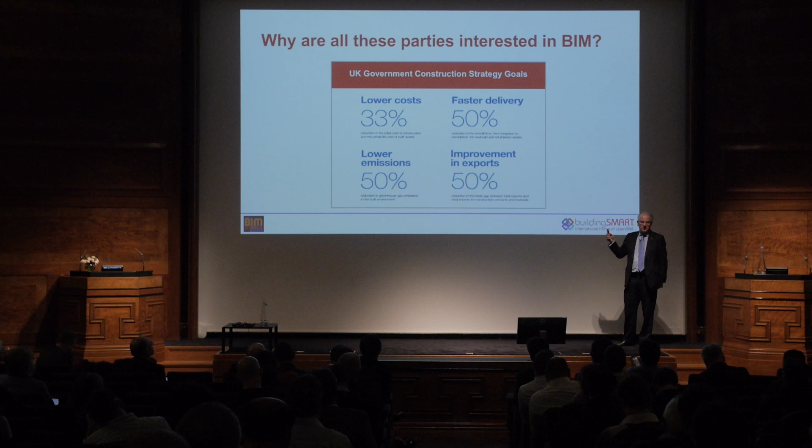Peter, I've borrowed one of your tables here because I think the UK government has been bold in setting out those targets. But the point I want to make is that those are very significant, and if they're very significant, they're very important for governments to go after and for industries to go after. So this is, in many ways, that overriding big, hairy goal that the industry has to deliver for societies that they are trying to serve.

And in fact, I also contend that we will not be successful as an industry if we approach this problem in a fragmented way, with everybody guarding their piece of competitive advantage. So I think the scale of benefits available, and the fact that there are so many countries around the world looking at this task, means that it is beholden upon the broader construction industry and owner community to really consider how they go forward with this.

And I want to use that as a framework within which to help you understand what buildingSmart International and buildingSmart chapters do. Chapters is, again, perhaps a buildingSmart word. Chapters are the national organizations that engage directly with users in different countries around the world. And that chapter program has been going for a long time.

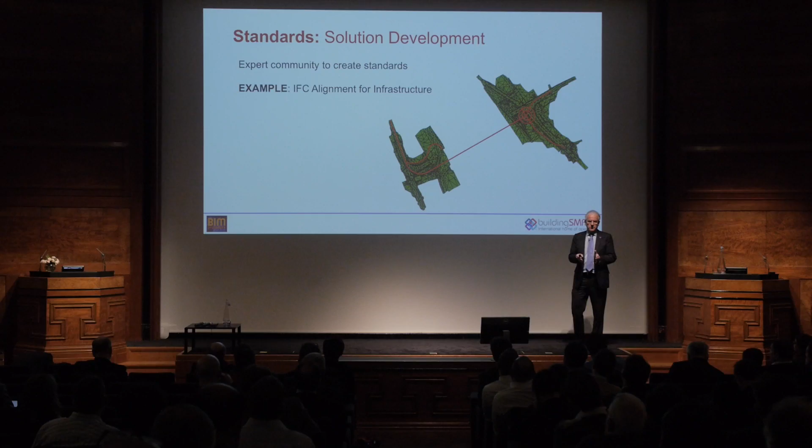The first is the standards program, and the most clear benefit I could point to is that we are doing solution development. This slide is an example of a recent project to develop, for the infrastructure community, an alignment solution to help them work in the digital world with the IFC tool developed in our community, and also in parallel with the GIS world and the OGC standards developed there. That was a very successful collaboration, a good example of the working-together theme, done in a relatively short period of 9 or so months, and now available as a standard to be used.

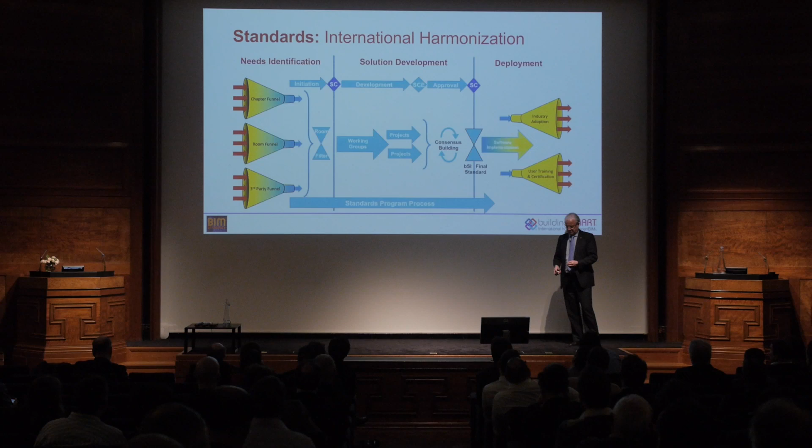The compliance program is probably ambitious compared to where we are today, but nonetheless absolutely important. People need to know that this stuff works and is being used properly. We will establish a program in time whereby we cover the basics of whether it's being used properly and whether it works — for software, individuals, organizations, processes, data, and products. This will probably take some time to be up and running, but it is absolutely part of the puzzle and necessary, and as Peter said, this transformation is a medium-term exercise, so I'm confident it can come into place.

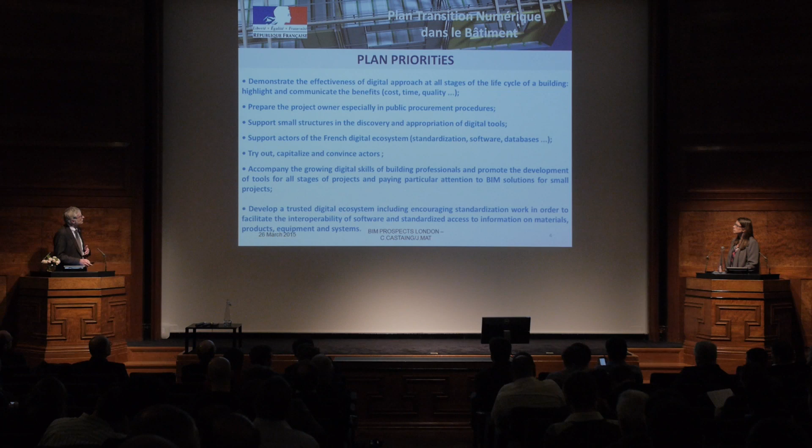Okay, so to summarize the priorities, we can say the following. To simplify, first is to develop the question of standardization, to support the existing standards, IFC and so on, creating the environment around that, but also to support the French initiative and the works to be done at different levels of standardization, from buildingSmart to ISO, CEN, and others, but also to support the activity oriented to the question of product libraries.

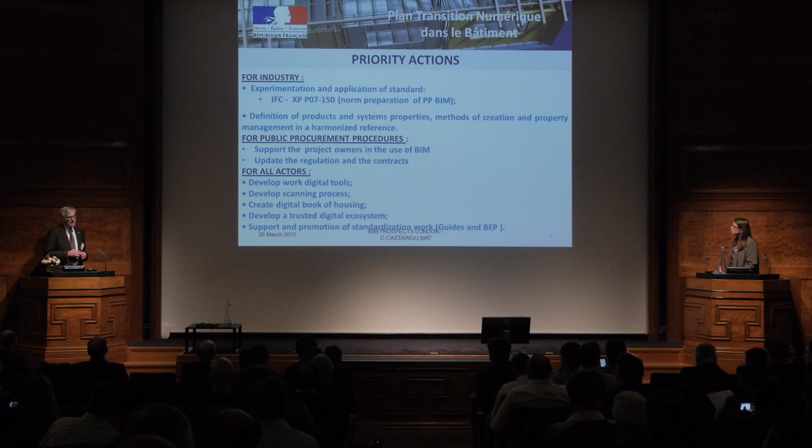I think I mentioned at the beginning that the big majors, one of the majors is Saint-Gobain, for instance, or Schneider Electric, or Legrand, like that. So they are involved in this research to develop.

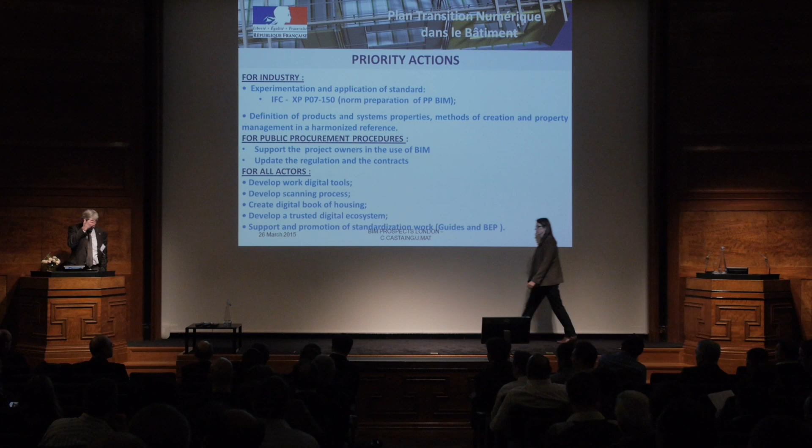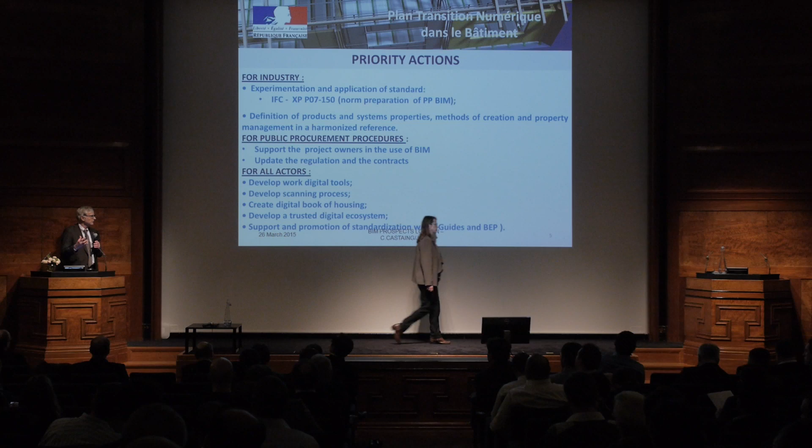If you want to speak with the very small companies, one of the best issues is that they are very small. If you are able to have everything available in a pack, like the windows, the equipment like that, in this case the very small companies are very interested by that. That's the reason we are pushing this kind of research, to be able to provide BIM for everybody. And BIM is not only the full 3D modeling, it could be only to have the catalog of the object available on site.

Second activity, crucial, is the question of how to facilitate public procurement. So there are two activities around that. The first one is how to manage the regulation as it is. We have a very strong regulation around public procurement. Is it compliant with BIM? And so on. So that's one issue. And if we don't want to transform that into a political issue, we don't want to modify the law for that, because that is an issue.

And the second one is how to manage or modify the contractual structure. Again, it's linked with the first. If we are able to manage the BIM toolkit and so on, it's a help for everybody and for all actors, which means to support the schools, to support the universities, to be able to provide human resources around BIM. And also, the final one, is to support all of the experimentation, to be able over the next two or three years to go smoothly into BIM in procurement and beyond.

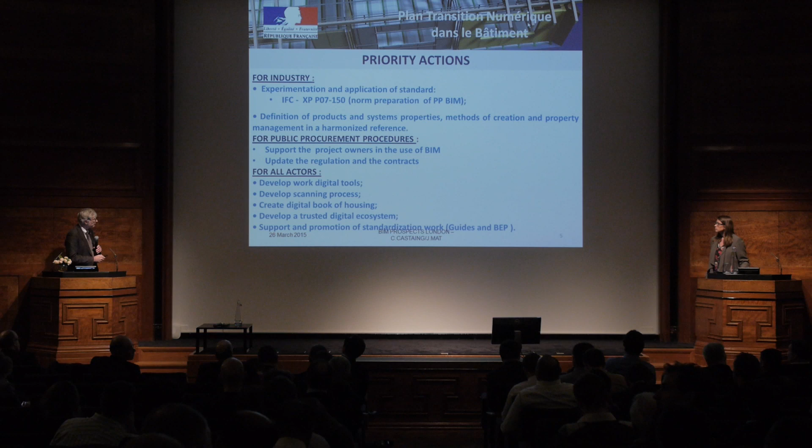And just to finish, the question is, there is somewhere 20 million euros available for that. We discovered that it's possible to have that. It's not a small affair, it's a big affair, and we think that is something really powerful to help all of the industry.

So how are we going to do that, if we want to go smoothly but not spend the money for nothing? The first one, we have this structure. At the top, you have a steering committee, which is representative of all of the professional unions, including also the various Ministry of Housing, Ministry of Energy, Ministry of Finance, and Ministry of Budget.

That's the reason we need to have also a structure to be able to justify a roadmap, and first to create a roadmap and to justify how we are going to spend the money. So you have a body, a technical body, with full-time people around that, and a technical committee to help this body make decisions. And then we are going to proceed project by project with calls for projects and bidding. That's the structure to be able to spend and to increase our knowledge about that.

That's it. Thank you. Christoph, thank you very much.

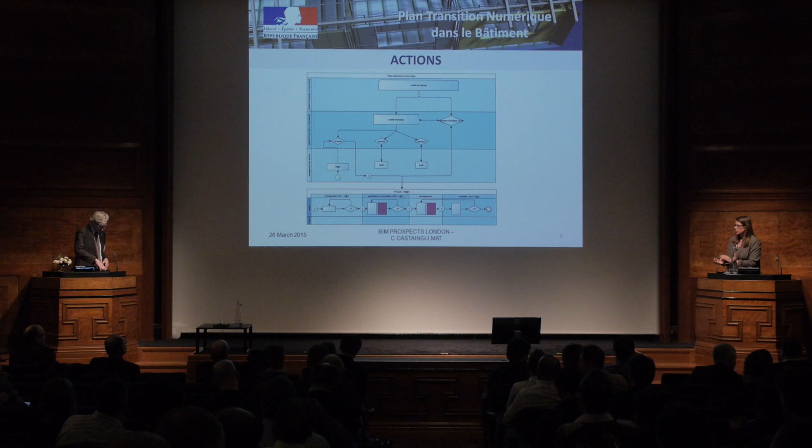Okay, Tommy, if I can invite you to come up to the platform here. Is it the right one now? Yes, success. So Tommy, okay, thank you very much.

My name is Tomi Henttinen, and I'm an architect by profession, even though I have been doing BIM consulting for 15 years already, so maybe not so much like normal architectural design work. In Finland,

BIM is always open standards. We work with open standards. My company, Gravicon Oy, we have been involved within the years for over 10 years now, with over 60 real-life BIM projects utilizing IFC in the daily routines of the project, and that's in design and construction phase. Nowadays, it's also in infrastructure projects where we are utilizing open standards, even though I'm not an infrastructure specialist. But anyway, the land XML format is widely used in Finland. So in Finland, BIM is always IFC.

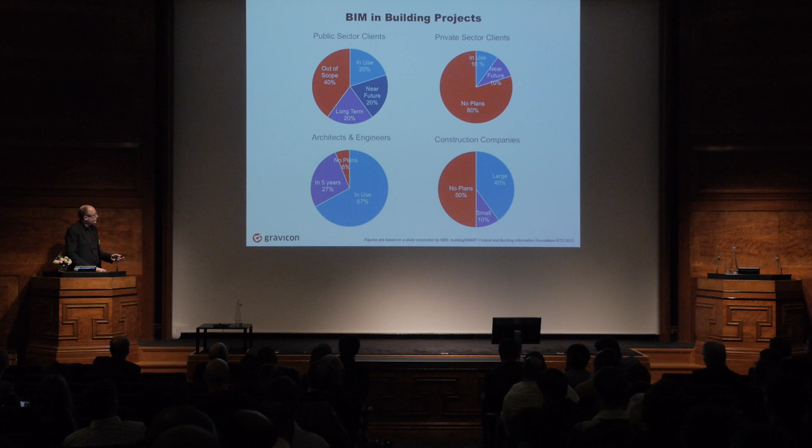I was hoping that Patrick MacLeamy would use his famous BIM Bam Boom presentation, so I could just refer to him, but maybe you should Google that. I'm not going through that. You should Google that, it's really nice. BIM meaning BIM in design phase, and BAM meaning the building, BIM-based assembly,

which is the construction phase. In those I would say that we are quite good in Finland. We know how to do it, and we use it in daily operations. Then in the boom phase, which is maintenance and operations, we are not there yet. So even though we are using BIM in design and construction phase widely, in the operations and maintenance, it's close to zero.

My idea of BIM is that together with other trends such as Internet of Things and others, we would get to the next phase, which is BIM-enabled business, which is bringing something totally new to this discussion. So it's something that, because now BIM is basically, to be honest, just, okay, first we were using pencil, then we were using CAD, now we are using BIM. The same thing done differently. But if we go to BIM-enabled business, then we are doing things in a totally different way. We have totally new stuff coming up. And this is sort of what we are at the moment trying to get our knives sharpened on in Finland.

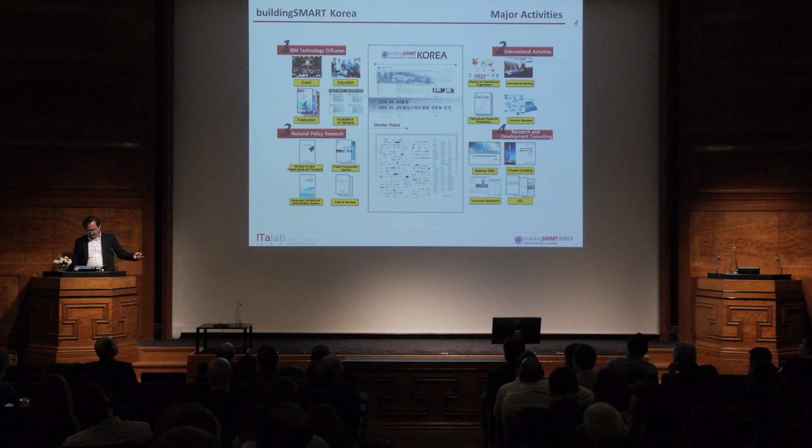BuildingSmart Korea developed a national guide for BIM in Korea, and also many public agencies BIM guide, and developed a guide for public company, design and construction company. This is some of the guide and standard developed for our government, agencies, and public companies.

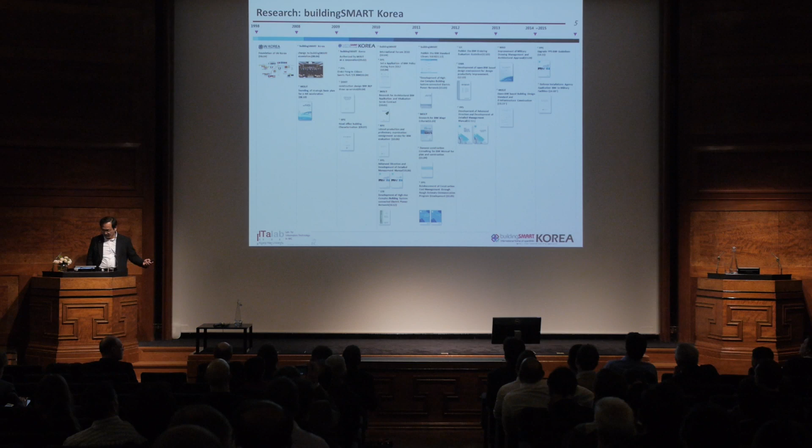For less than several years, we developed a guide for public procurement service. It's a GSA equivalent organization in Korea. And also we are developing a guide for Ministry of Defense and construction as well.

A few years ago, our government invested a lot of money on open BIM. For this event, this Monday, Tuesday, and Wednesday, we had an international summit for BuildingSmart at BRE. There were more than 20 Korean delegates participating.

They mostly participate in this project. It's about a 6 year project, now became a 7 year project, started last year, and government supported about $30 million US, and with money from the private sector, it is more than $40 million.

This project until next year is stage 1, but after 2016 or early 2017, we are going to the second stage of this project, and our government recently announced to invest much more fund on open BIM and BIM technology.

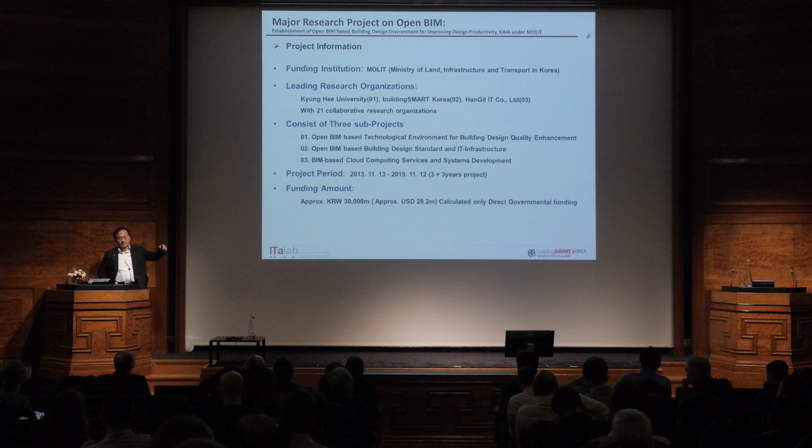Currently we only submit digital 2D data for the permission, but we are trying to move on to an IFC-based BIM model for the permission in the future. So we are developing all the core technology for that.

The first target of this project is enhancement of design quality, not construction yet. So at the first stage we concentrate on quality of design rather than construction, because design is the most key stage for saving cost for the construction in the future stages, or also for the maintenance stages.

So we concentrate on design, libraries, and guides for that. In the future, we're going to apply those technologies to the whole built environment, like railway, plant, road, and water. So this is the basic technology for the future.

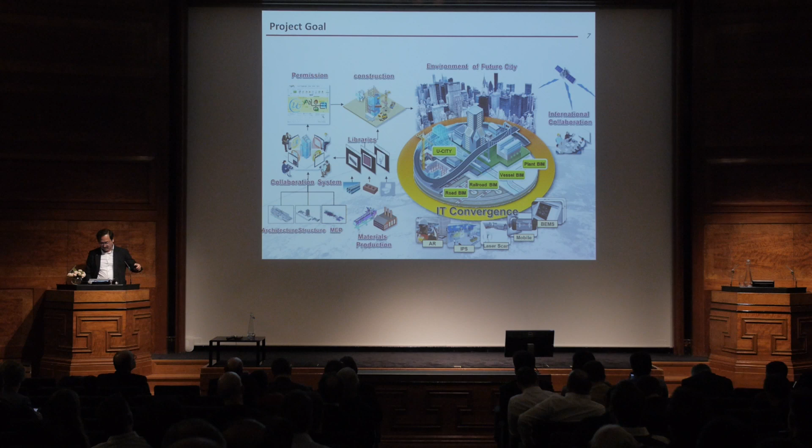This is one of the key projects we are targeting right now. We want to save money, cost, and resources for the building permission.

The architect needs to supply only one single IFC-based BIM model for the approval, and then by using those models, the person who permits the building checks the energies, cost, and all the regulations automatically.

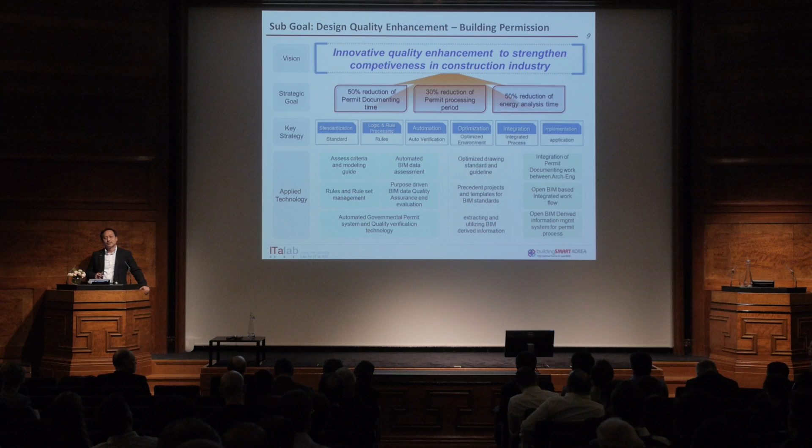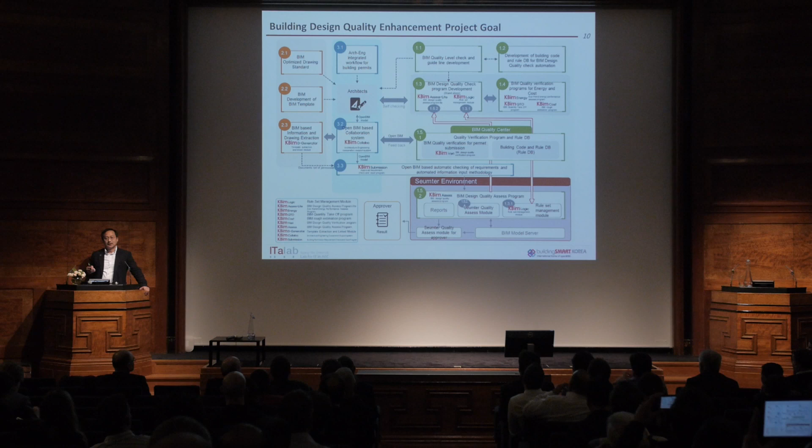So this is the actual scope of each module, how we developed it for the permissions. If you see the bottom left spaces, we're developing about 10 different softwares, K-BIM softwares for permission, collaborations, and logic. We analyze all the building code and atomic sentences and then put them in the database, and we use them for automatic code checking in the future.

And if you see the right bottom spaces, we can see the Seumter environment. That's for the building permission environment in Korea. So they check the BIM model for the approval. This is one cycle process for the process, yes.

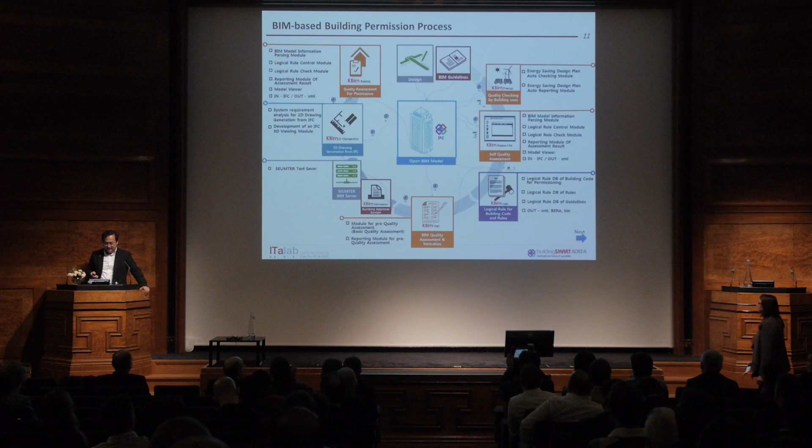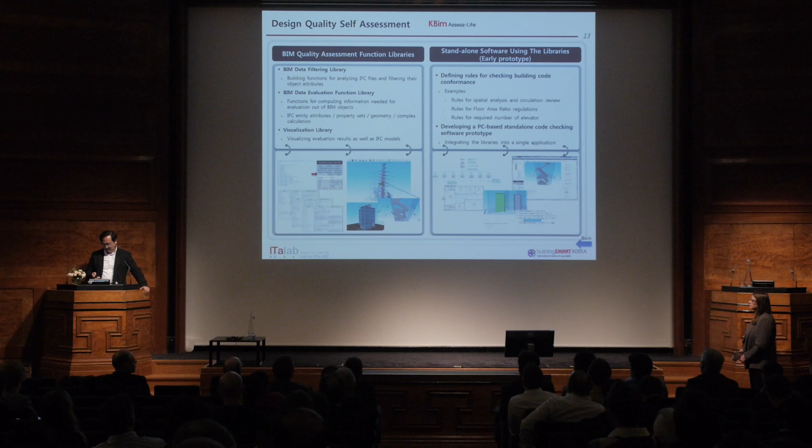And another module for K-BIM logic, and this is Assess. This Assess Lite is for the small versions. Design office can use it without internet connection. And if they do self-checking finished, they submit it for the approval office.

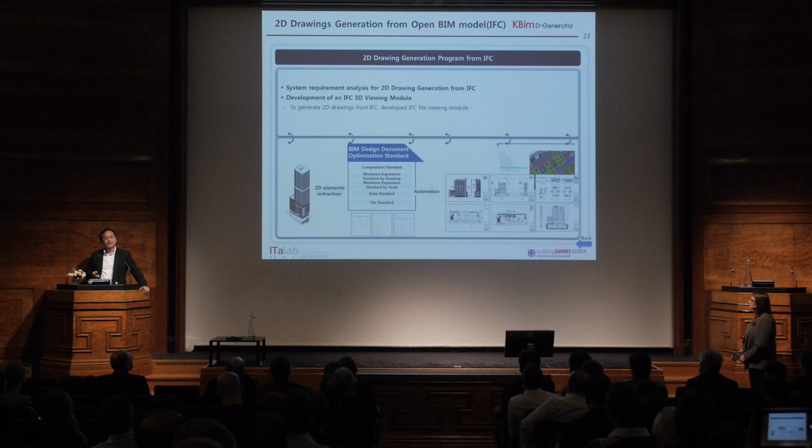And they can check the energy requirement required by our government. Also, one notable thing is, from the BIM model, we generate drawings for the permission. I think more than 50% of drawing can be generated from this software. And this is the submission environment and software for the Korean submission system.

As I'm running out of time, maybe 1 or 2 more minutes. This is the standard and content development by BuildingSmart Korea framework.

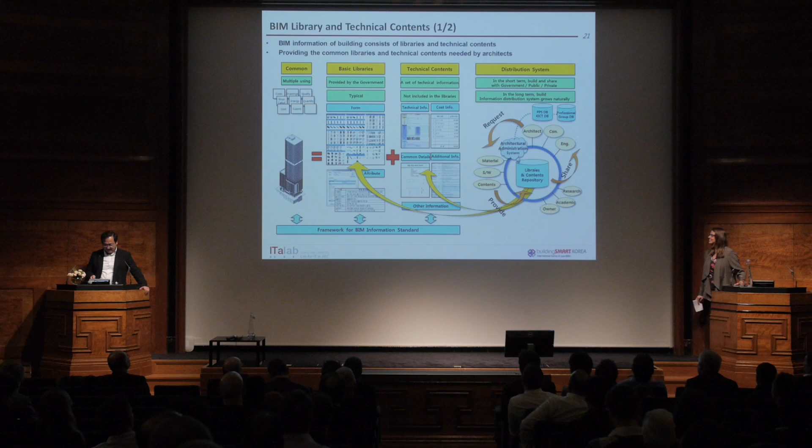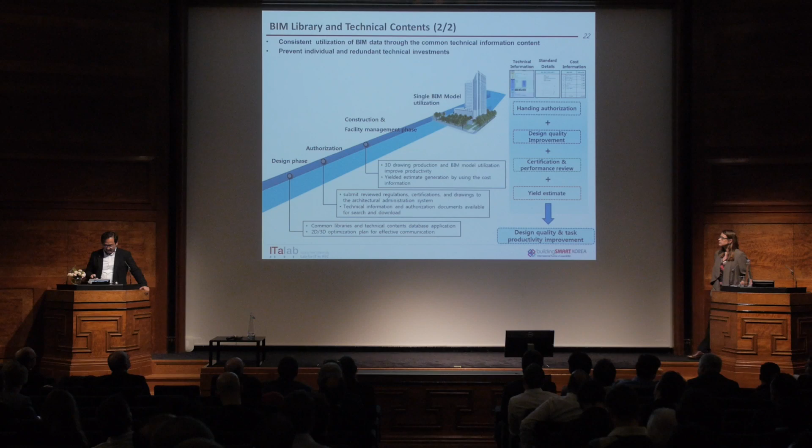So she's watching me. So this is the last goal. Yeah.

This is the aim of my dream, or our dream for BuildingSmart Korea, BuildingSmart, to realize we want to have an open, not closed BIM, open BIM for every phase of the construction in the future for free. Thank you very much. Yes.

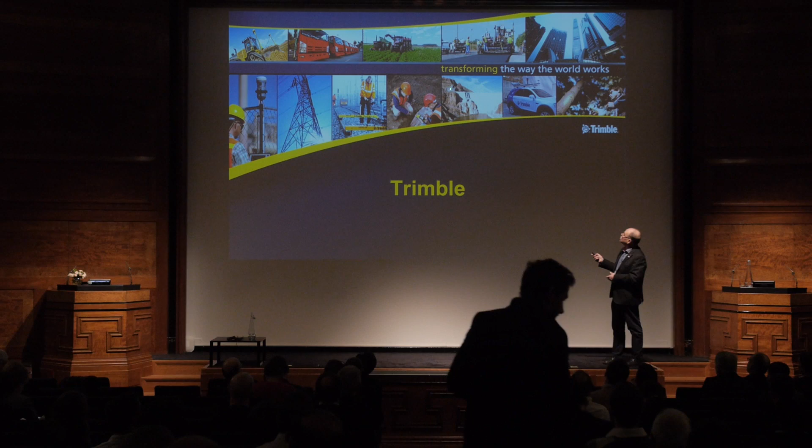Trimble's slogan is transforming the way the world works, added implicitly through technology. Trimble as a company started, you probably know Trimble and GPSs, Trimble and sensors, total stations, all kinds of sensing equipment. Trimble even started developing consumer equipment, but quite quickly Trimble changed its strategy to focus on the professional market and came up with this transforming work slogan. Then we went on to connectivity, modeling, and analytics is the last one.

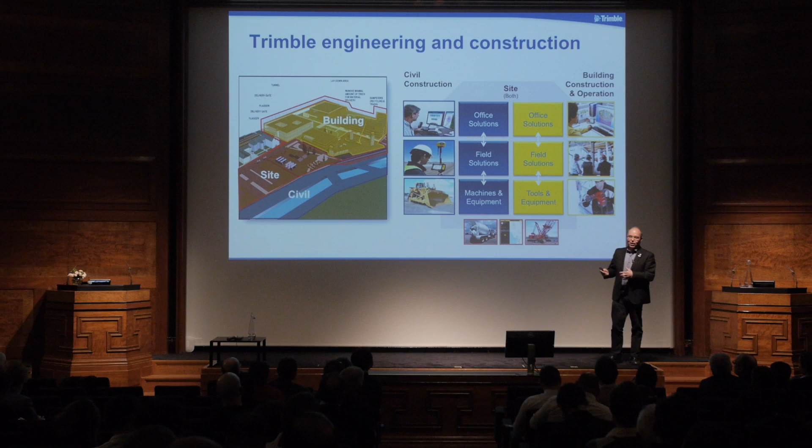We serve a lot of industries, and most of the industries we serve have to do with the built environment. We deal with different aspects of the built environment. We have support both for civil construction, building construction and operation, and of course the common thing to those is the site. As the site is very important to us, Trimble starts from the very roots, from the bottom up, from the kind of mud. The term our director uses is moving dirt from one side of the road to the other, and he says this very often, but I won't be using that so much.

So a few words about Trimble Buildings. Trimble has been quite busy acquiring companies, and as you saw in the development, Trimble has been moving from hardware to become more and more a software company. Today, a big portion, I don't know exactly how much, but close to half probably, of Trimble's turnover is already software and services, so that's changing fast. We have acquired a lot of companies, the most known SketchUp, Tekla, Vico, and the latest ones are Gehry Technologies, which we just acquired late last year, and Manhattan Software developing FM software.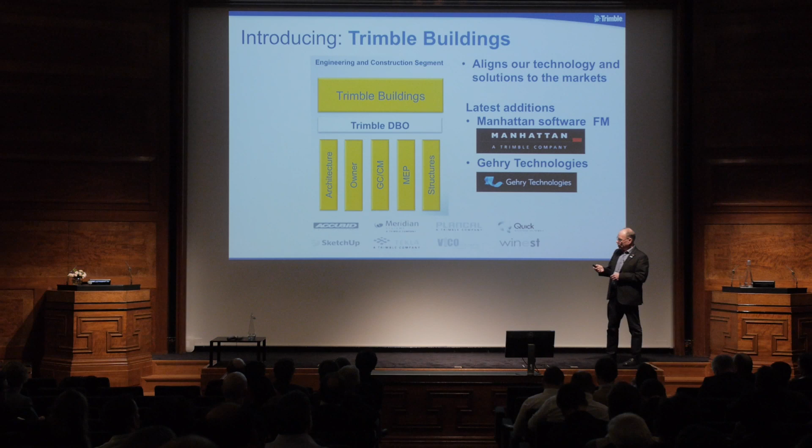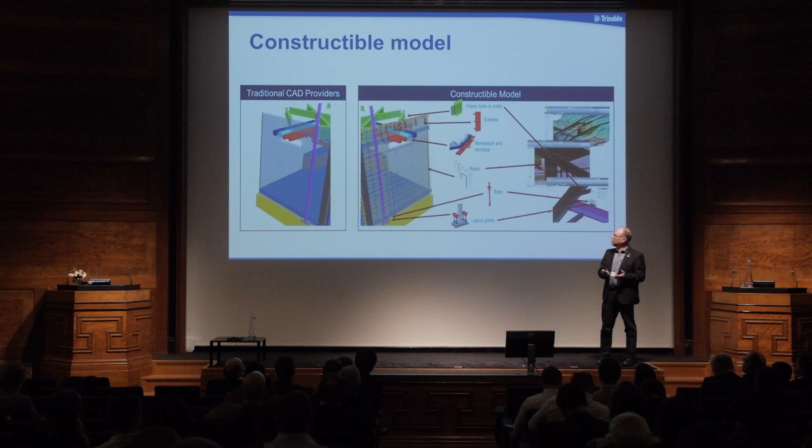Our kind of focus is the constructible model. That's kind of understandable. We come from the bottom up, from the actual construction, from the site, from the mud, if you like. So our point is generating structured information, so much information that you can construct just on the structured information. In principle, our goal is that you don't need any documents, you don't need 2D documents at all. That's our long-term goal.

Our latest product, which we have announced, is called Trimble Connect, which is actually based on Gehry GTeam, if you've heard about that, which is a collaboration hub. We at Trimble believe strongly that these collaboration hubs, which all the major BIM vendors already have, will be the focus of application development in the future. Most new applications will be based on these kinds of hubs.

The interesting thing in BIM in general is that the focus is clearly shifting from producing information, generating, modeling, creating models, to consuming the information. I'm coming back to this a lot later in the presentation.

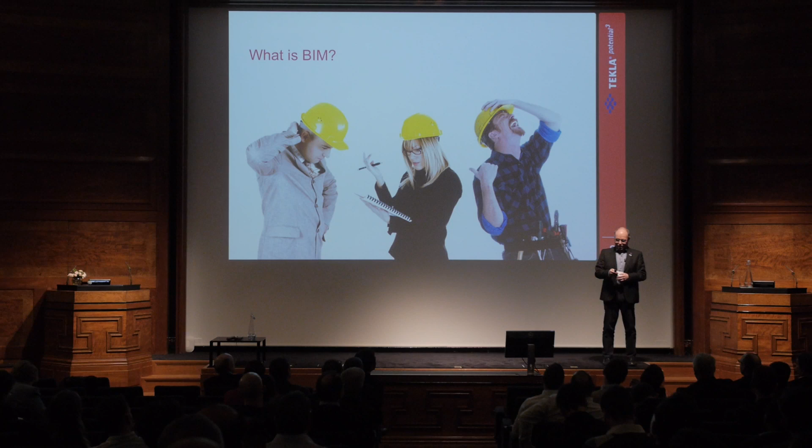But then we go to what is BIM. I think I earned the right to have opinions about this because I was one of the few, or the only one, who put up my hand when Anne asked this morning if anybody had any issues with the UK BIM concept. So you've heard about this already.

There is no real consensus of what BIM is - is it software, process, whatever - and even the acronym. So we take the B, it can mean building as a verb, building as a noun. M can mean management or model or modeling, and the latest for the I I heard today, which is the best one, better information management. So we have many explanations for the acronym.

The most common perception, if you go around the world and ask people, is that BIM is software. If you're using some BIM software, you are doing BIM - that's the kind of common perception. And you hear these others, but my favorite, remembering my background as a manufacturing engineer, is that it's just a technology. Nothing more, nothing less than a technology.

The issue I have with the UK BIM initiative is that BIM as a concept is kind of inflated and bloated and made so big that - there's even a documented theory on how to sabotage standardization work by making something you're trying to do unproportionally big so that it becomes impossible to implement. And that's why I want to go the other way around, very much so.

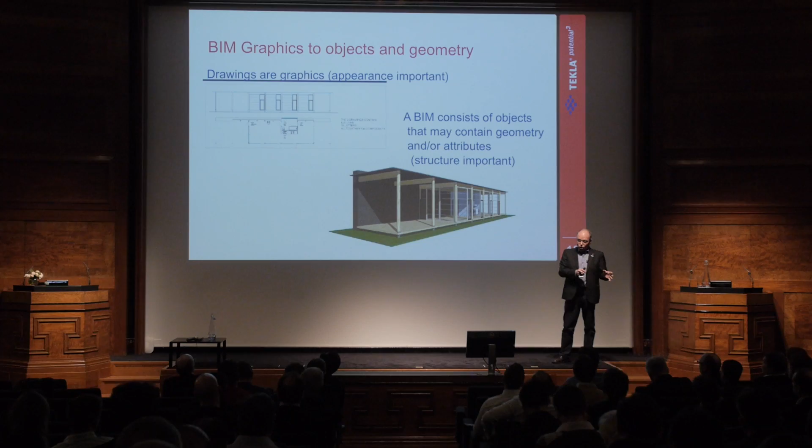I want to make it very clear what BIM is. And what is it, in my opinion? Well, it's a very simple thing actually, because it's about how we deal with information - how we create information, how we transfer information, how we consume information. Today that's done mostly through drawings. So BIM today has been used mostly to create drawings - that's 90% of the use of BIM. You model, but then you create drawings based on that.

So the technology, in my opinion and point of view, is that BIM transfers information processing from being human-readable and human-understandable documents with graphics. Because graphics - this is very important - graphics is a visualization of geometry. When we go to BIM, we don't deal with graphics, because graphics is for human consumption, for humans to understand and perceive, whereas geometry is the mathematical definition of something physical, and that's for computer consumption - for software to understand and deal with automatically.

So for me, BIM is the transition from processing information in human-readable format to processing it in machine-readable format, so that software can automatically understand and act upon the information it receives without human intervention - automatic information processing, as simple as that. So we extend IT from what we today call communication technology, to also include automatic processing, so we can do things automatically.

Here, of course, in drawings, appearance is important because a human looks at it, whereas when we talk about structured data, the structure is important because computers are stupid. Humans are very adaptable, so they can understand some small scribble on the back of a cigarette package, which software can't. For software, the structure has to be very clear, explicit, and exact down to the last bit, which is very, very different. This is what makes BIM a disruptive technology, because it changes very fundamentally how we treat information, both in the creation phase, but specifically in the consumption phase.

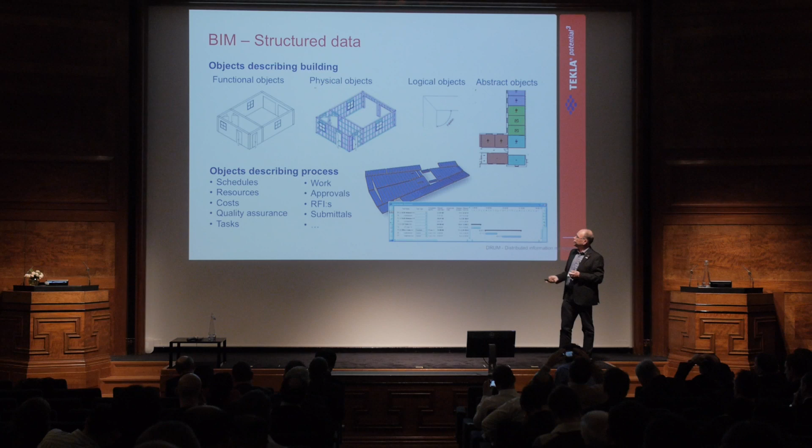So then Open BIM - well, you have heard this many times already today, but the important thing is that it's not just IFC. As I work with many standards organizations, there are many other standards than IFC. CityGML is the most obvious. With that, you can model buildings from the point of view of using the building, how it looks, how it serves its users. You can fully model a building, but not for construction, because IFC's scope is construction primarily.

And so we have many others. KML is the Google Earth format, and there are many others. There are new ones being developed. There is an InfraGML coming from OGC with the purpose of modeling infrastructure, and there are others.

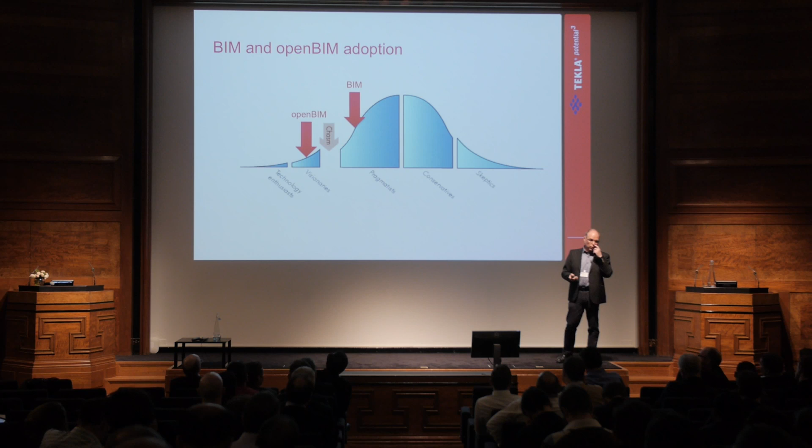And this is BuildingSmart's position on BIM sharing: open, structured, semantic, standard data. Sounds like a mouthful, but it's actually quite simple.

Open means that the information is available in the first place. Structured means that we have a structure, object structure in BIM, most often, very seldom relational. Semantic means that we know the meaning of the data. We know if we have some geometry, we know what that represents in the real world.

We know what the attributes mean, and we have a general understanding of the semantics. And standard means that the structure and the semantics are commonly understood. So without getting the information from some other source, we know the information structure, and we can consume the information automatically. And so IFC fulfills this to 100%.

Then a bit more elaboration on this ambiguous modeling, that we don't have a single model representing the building, because an object is different for different disciplines, different parties, different points of view. So if we take a slab, the architect typically models the slab of a floor as one object, and for the engineer it might be 3 objects. For the detailer it can be 10,000 objects.

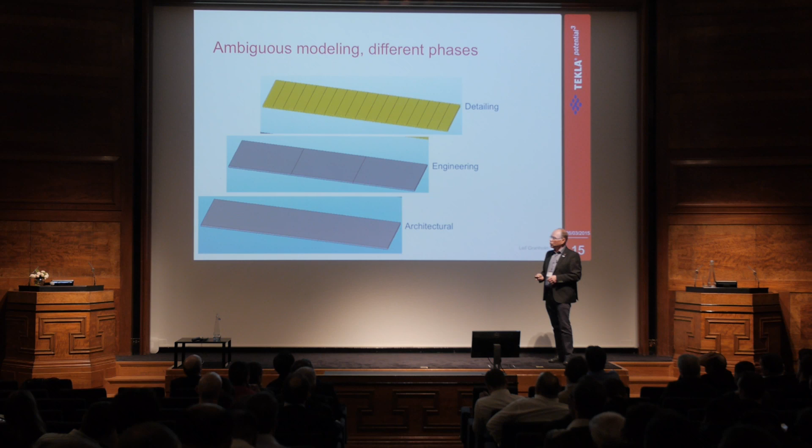And it's the same physical phenomena, it's the same thing which we can touch and use. So there is no way we are going—this is a question of what you are doing and trades. Because if the architect typically massages a building, makes rather big changes, makes it bigger, smaller, different shape, other things, you can't do that with the detail model. That you have to do with the architectural model.

And here I'm saying that this is not a sequential process going through these levels of development. In today's construction world, they have to coexist, cooperate throughout the project, because even very late in projects in these days, you can have big changes.

If you are building a mall, for instance, you might initially have planned that there will be a textile shop here, and then the owner says to the designers, oops, there was a new change, we need a spa here instead. So you might have very big changes very late in projects these days.

Also, how we consume the information is very important about information management. With this concept, which I'm proposing, we can do the information management in the same way as documents with this reference model principle. So when we receive information in IFC format, CityGML format, or InfraGML format, we don't convert that to native objects.

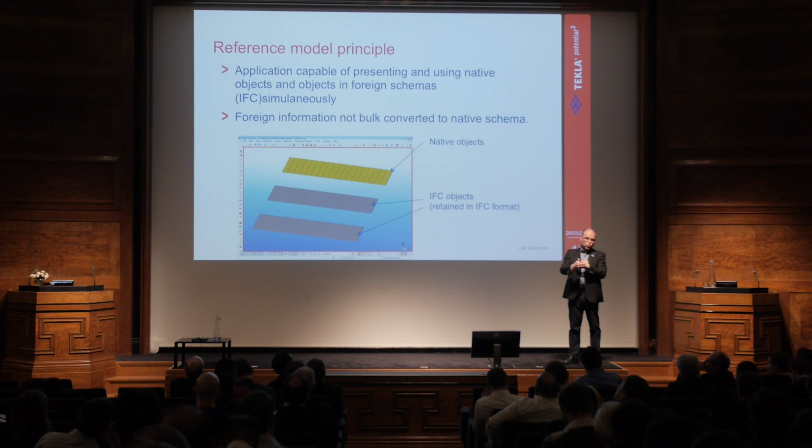We keep it as IFC, and our software can do so that they can interoperate in real time. So we have our own native objects, which we own, and then we have the incoming standard data, which we keep in its original format, and we have functionality to make interoperability between those.

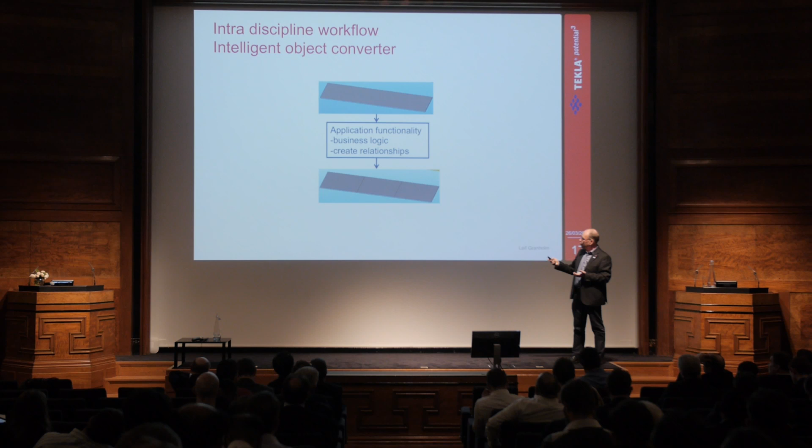And specifically, if we take this progression of level of development, so that we go from the architect's single object slab to the engineer slab, we have application functionality which can take this incoming architect object, leave it intact, it doesn't change it, and then create the engineering object, so it includes the business logic of what an engineer does, and creates relationships.

So as we are doing this, using these semantic web technologies, there are lots of activities going on now in buildingSmart, really forcefully developing how to do this to get a reasonable workflow without disrupting information management totally from the way we are doing it today.

And this is very important, we have to learn, we have to stepwise move into BIM. We can't move in one huge stride. We will fall flat on our noses if we try to take too big strides, because it's really disruptive in the way we handle information.

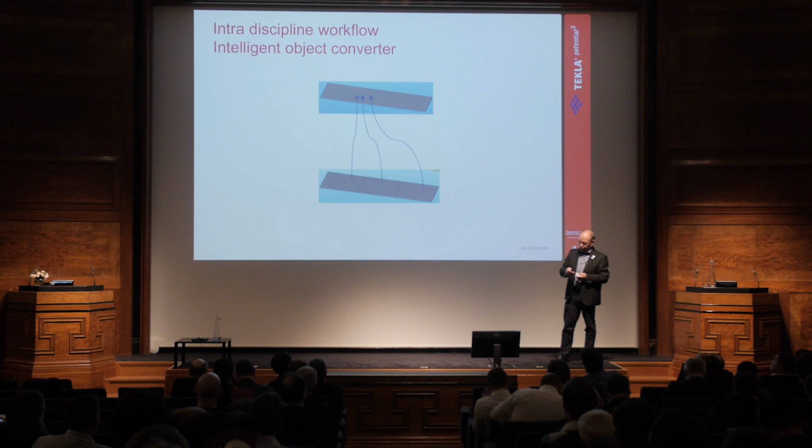So this you have seen in many other presentations, that we end up with a bunch of models. We don't end up with the model. In the typical Helsinki Music House, which was a very prominent BIM project, there were about 150 models in the end in the project, which went on to facility management.

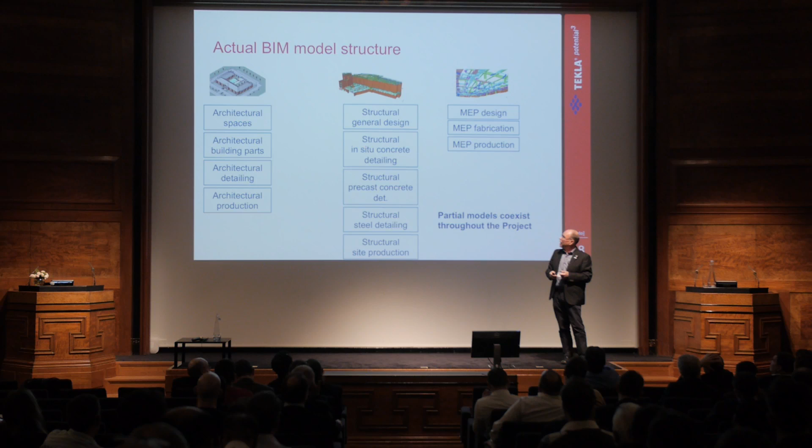So a few words about why. Why are we going over to semantic data? So this automatic receiving and using the information automatically is a big thing for the future, but that's a smaller thing for the long-term future.

So technology, robots, augmented reality. I think that augmented reality will be the killer app for semantic data. That will be the main way we will consume information in the future, and that's also virtual reality.

We learned this week that we are starting an augmented reality workshop or work group in buildingSmart, and we learned that it's actually mixed reality, because you have augmented reality, diminished reality, and a third one which I don't remember.

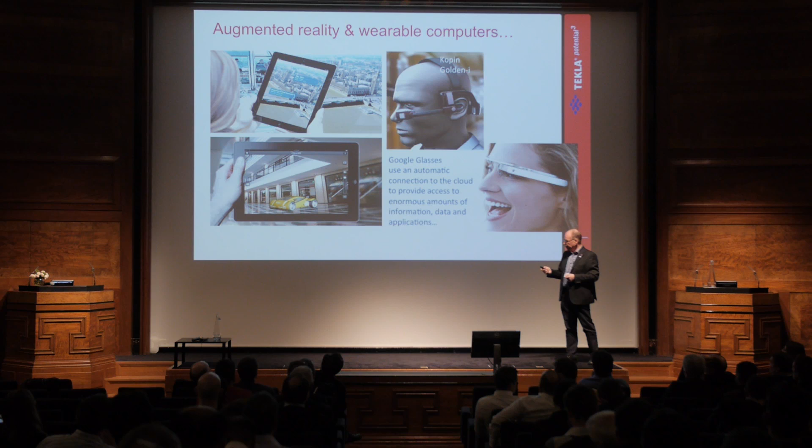Augmented reality with different kinds of equipment, and here I really believe the main use for this will be all kinds of wearables. Using it with a tablet is just early development. The real use is that you can buy helmets with a heads-up display for construction workers, available off the shelf today. So this is going to be the way.

Then robots, I'll talk more about this in a moment. And of course this is very important, because as we all know we have challenges recruiting good people to the construction industry, so technology is definitely a way to do that.

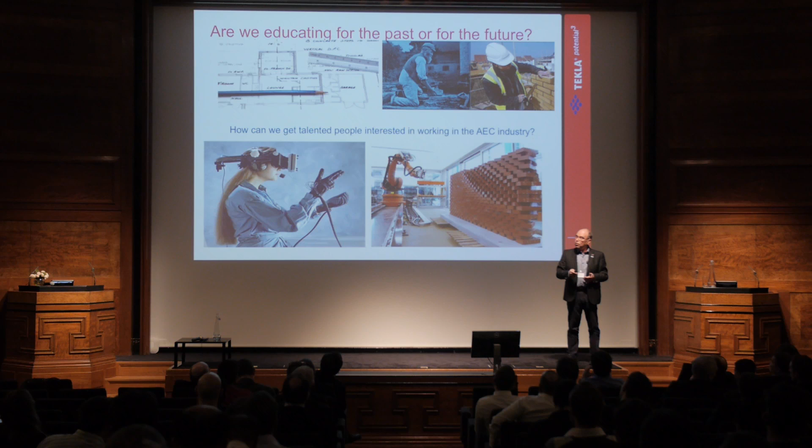This is from Arto Kiviniemi's picture, he's working hard on this. But then, as the last thing, I'm going to show a kind of use case of what this could, or will, mean in practice.

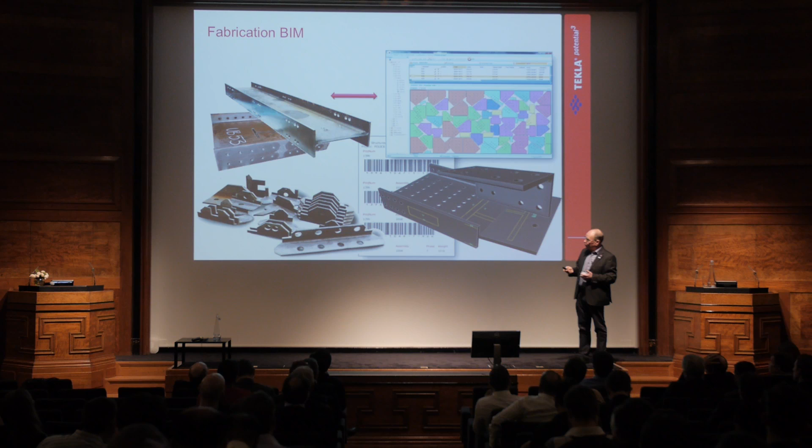Tekla's background is in steel, structural steel, and we are working heavily on fabrication BIM. So where we are today is that we have this kind of flat pack steel delivery, like IKEA flat pack furniture. The factories can more or less automatically produce all the parts needed for structural steel.

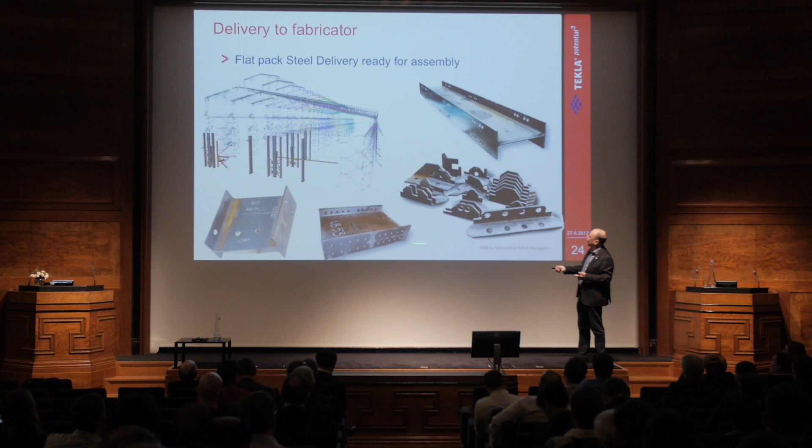You can have a factory making 30,000 tons of steel a year, with the part of the factory making the parts running with just 2 guys. But then when you go to assembly and welding, 250 to 300 guys are processing and welding these same parts which were produced automatically by the factory. But that's about to change.

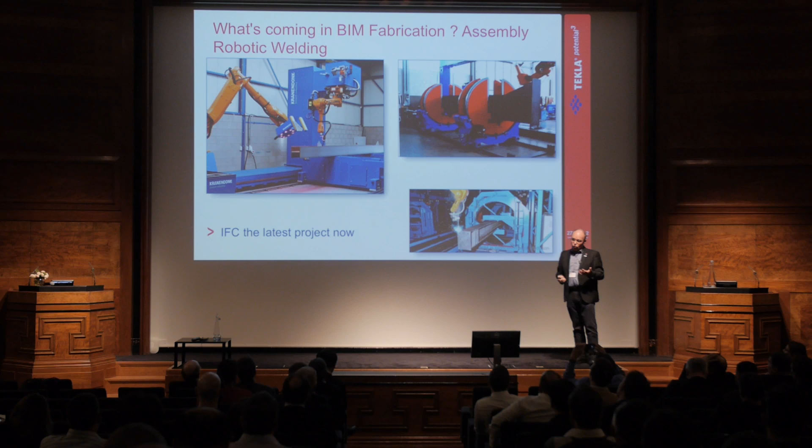What's coming next is assembly and welding, robotic welding. This is a very interesting point. What's happening now is that the next generation of machinery, also for steel but also other disciplines, is going to be that you build some kind of pedestal and bolt on a standard industrial robot, because these robots are so good, so precise, so exact, so reliable today that there's no point building specialized hardware to do these things.

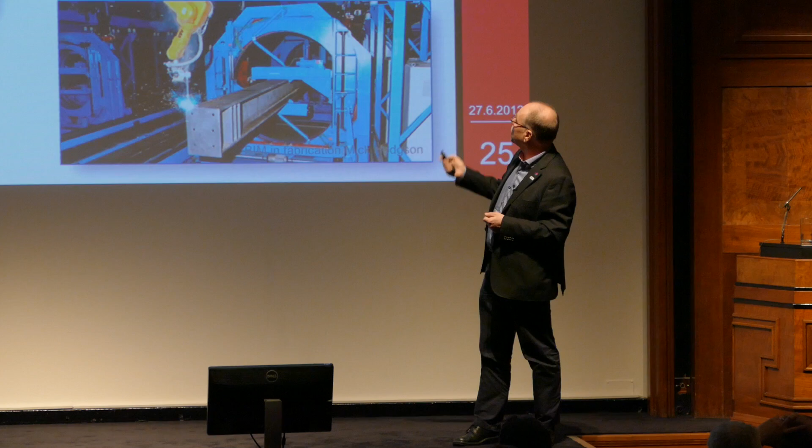You just take the robot, and one interesting thing here is that it makes the project of producing the machine into a software project. About 90% of the job of creating a machine like this is writing software, which is quite interesting. Different kinds of assembly machines are being designed and manufactured this way. They're not mainstream yet, but they are becoming so.

But then the interesting point is that the information supply for how this flat pack steel is made is based on DSTV and DXF, i.e. 2D formats. No good for welding or assembly. For welding or assembly you have to have 3D format, and this has been my pet project for almost 10 years, 7 years working to make this happen with IFC, and that's now happening.

So we have a project today together with the American Institute of Steel Construction, Georgia Tech, Tekla, FICEP, and many others now in the project, where we are developing a model view definition to take IFC all the way to the NC machines, controlling the NC machines directly with IFC, and that's happening.

This is a really, really good use case for how semantic data is going to be used. This will further both the information processing automation and the actual fabrication machinery automation forward a great deal. And that's really needed, that's a real boon of BIM.

The interesting thing with this new generation of machines is also that it's not just off-site, it's also on-site, because the new machines are much smaller and cheaper, so you can do the fabrication on-site as well. That's very interesting, because transporting things like rebar cages and other items is quite hard.